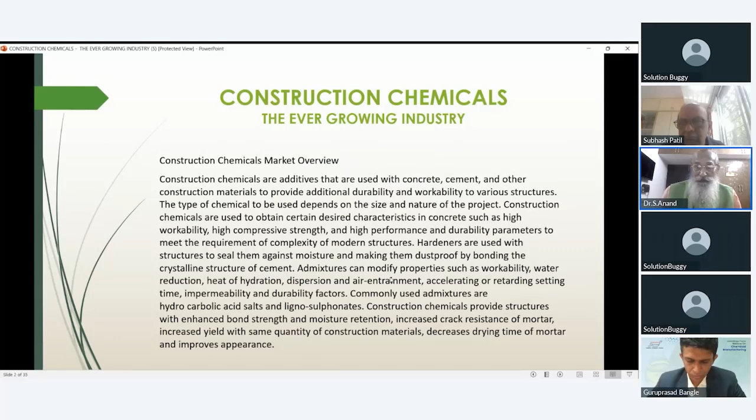There are various sectors in construction chemicals, with different types of products. In the next few slides, you will be able to see that, which I will explain one by one. Next slide, please.

On the basis of types of product, the global market is classified into concrete admixtures, waterproofing material, flooring, industrial flooring, tile adhesives in the tiling sector, repair and restoration mortars, and other items like sealants, grouts, performance chemicals, and other additives which are very important during the construction of building and structures.

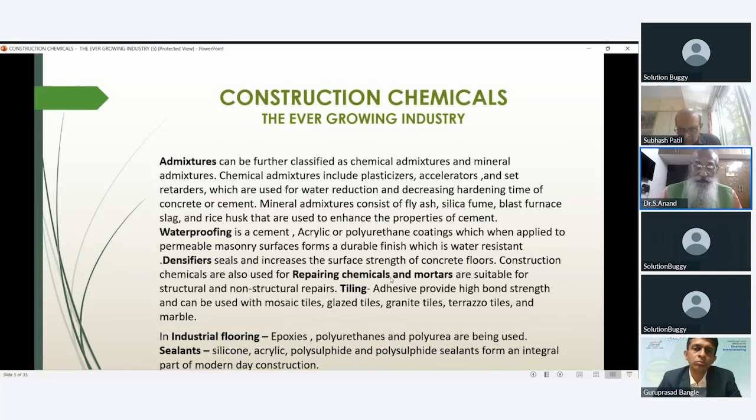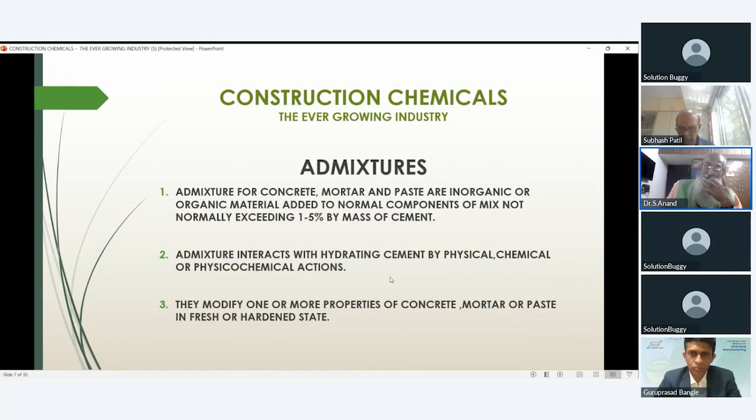Admixtures are usually very complex chemical compounds, excepting a few. They're unlikely to be pure compounds, but associated with some minor chemical additives, or they may be mixed formulations. Thus, admixtures are those ingredients in concrete other than Portland cement, sand, aggregates, and water that are added to the mixture immediately before or during the mixing of the concrete in the RMCs, ready mix concrete plants.

The classification of admixtures: there are different types like air entraining admixtures to make lightweight concrete, water reducing admixtures to give high strength.

Hello, am I audible? Good, please go ahead. Yeah.

Plasticizers, super plasticizers, accelerated admixtures, and retarding admixtures.

Hydration control admixture, waterproofing admixture, where the crystalline admix is used to make the entire concrete structure waterproof, corrosion inhibitors, alkali silica reactive inhibitors, then coloring admixtures, and miscellaneous admixtures such as those for improving workability, bond strength, high strength, damp proofing, permeability reducing, grouting, gas forming, and pumping admixtures. These are all the different types of admixtures which are used as per the requirement of the site conditions.

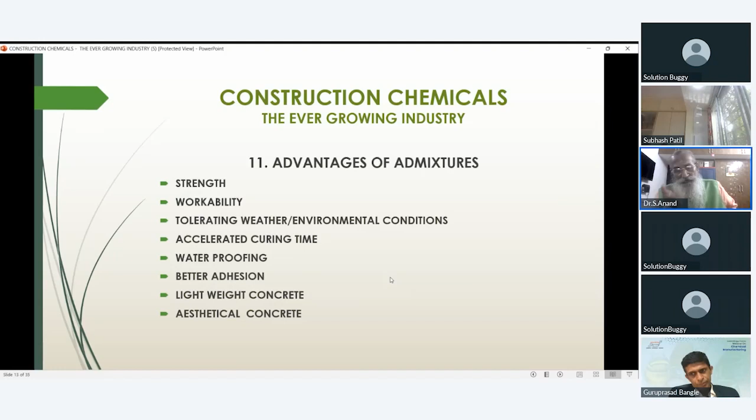Can you also tell us how much it would cost to set up a plant if somebody is looking to set up an admixtures plant? That setting of a plant is coming at the end. How much will it cost? On the next slides, almost at the end of the presentation, you also get it. Right, okay.

Now this is a broad picture of waterproofing chemicals, where all it can be used in a housing structure. You can see it can be used in the terrace floor, for water tanks, sunken slabs, all these areas in the terrace. Then for walls, you can use it for interior and exterior wall waterproofing. Then for underground sumps and all underground structures, you can use the crystalline admixture, waterproofing admixtures to make it totally waterproof. Then you can also damp proof the walls. The crystalline admixture you can use from the negative side also.

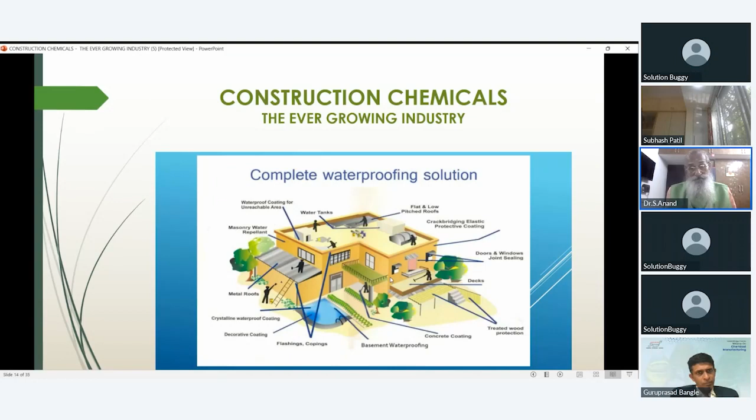Next slide, please. Next slide. Yes. No.

The waterproofing system covers every need of the building and construction industry, to protect from water ingress or loss of water through structures. The complete building structure from basement to roof is protected from rising dampness, moisture, seepage, and leakage. The technology ranges across acrylic, SBR latex, crystalline, epoxy, water repellent polysiloxanes, polyurethanes, and bituminous based formulations - these are the different types of waterproofing material. The coating fills and seals the concrete pores, micro cracks, and capillary tracts in joints, walls, floors, through which water seepage can occur, forming an integral part of waterproofing compound without breaking existing brickbat coba and concrete screed. That is about the roof terrace waterproofing.

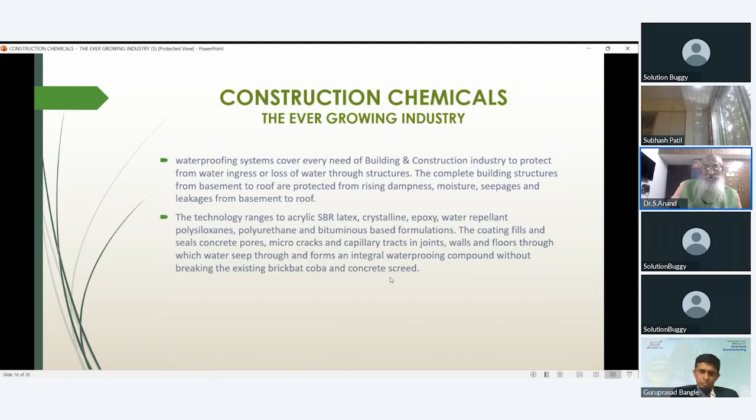Main features of waterproofing are excellent resistance to hydrostatic pressure. These are the conditions in the basement level. Also resistant to water and chemical ingress.

In the seashore area, the water is very corrosive, and if properly waterproofed, it is resistant to this chemical ingress. Then there is protection from moisture permeability in high water table areas. The water table is high, so moisture can permeate from the floor, but if properly waterproofed, this moisture will not permeate.

Protection from corrosion. In terrace areas, etc., wherever reinforcement bars are used, if there is no proper waterproofing, moisture will penetrate and the bars get corroded. In due course of time, they will form rust, expand, and spall. Spalling will occur and the structure will start degrading.

So waterproofing is a very important aspect.

It can be applied on old and new structures, and also from the negative side. As I told you, the crystalline waterproofing system can be applied from the negative side. Normally waterproofing is done from the outside, but suppose your structure is complete and then you have a problem, this crystalline material can be applied from the negative side inside, and it will go into the structure and waterproof the capillaries, sealing them so the structure becomes waterproof.

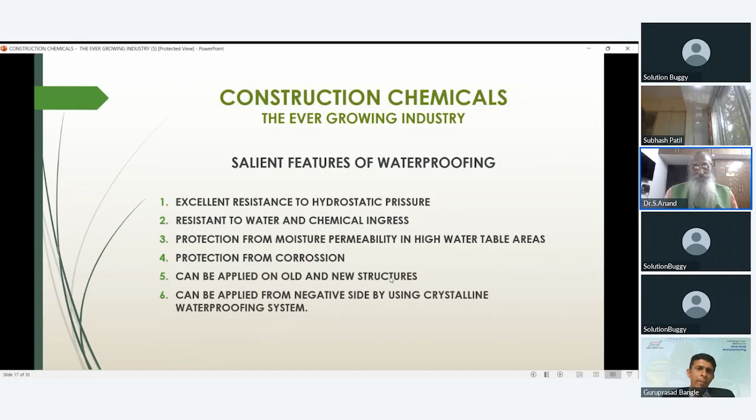Sir, one more doubt people have is there are already players like Dr. Fix-It, or it could be Asian Paints. How does a new entrepreneur compete with such players?

Now, applications of where waterproofing can be applied: tunnel construction, retaining walls, foundation walls, parking areas, terrace gardens, cooling towers, balconies, terrace basements, underground sumps, reservoirs, ponds, kitchen and wet areas, podium, roofs, exterior and interior walls. These are the complete areas where waterproofing has to be done. It's a mandatory thing, otherwise the structures get dilapidated very soon.

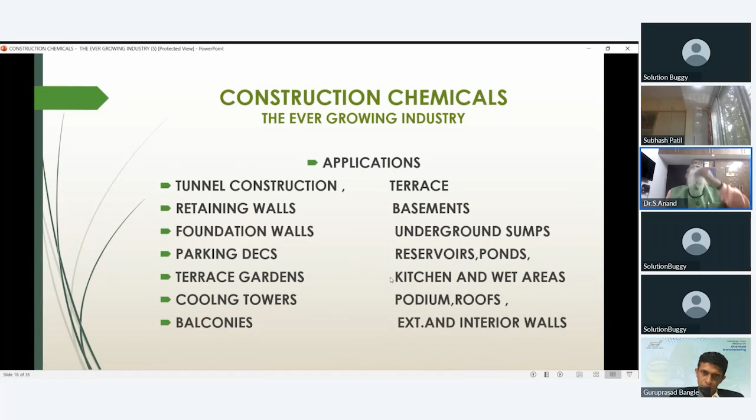Next segment is industrial flooring. As I told you in the beginning, there is epoxy, polyurethane, polyurea, and then you have polished concrete flooring.

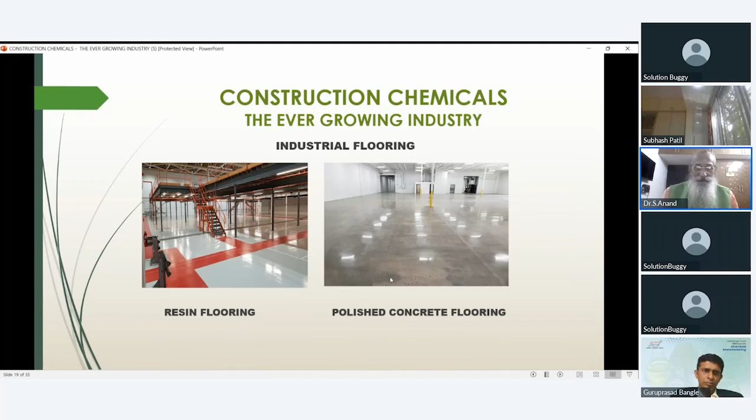So this is epoxy, polyurea - these are the pictures.

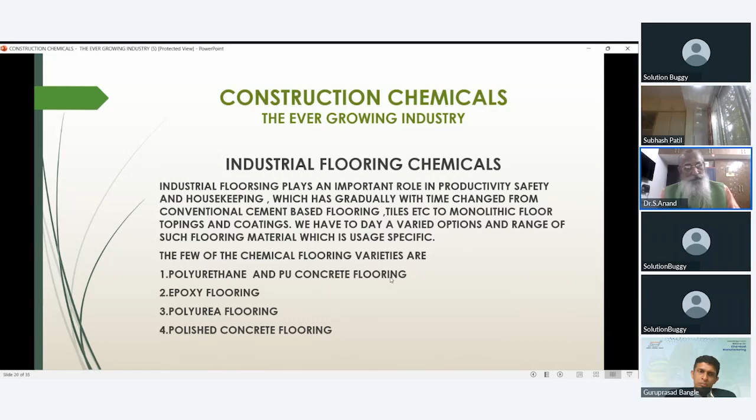Industrial flooring plays an important role in productivity, safety, and housekeeping, which has gradually changed over time from conventional cement-based flooring, tiles, etc., to monolithic floor toppings and coatings. Today we have a very varied range of flooring materials which are usage specific, such as polyurethane and PU concrete flooring, epoxy flooring, polyurea flooring, and polished concrete flooring. I'll explain each of them in the next slides.

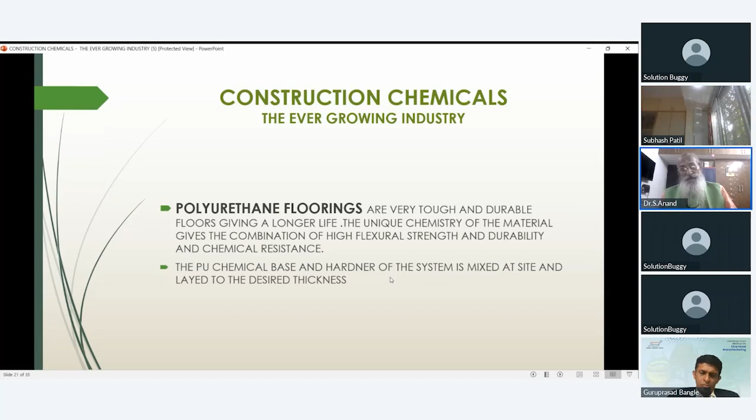Now, epoxy flooring has been very popular since the 1990s. These are engineered chemical adhesives that give industrial floors durability, scratch resistance, chemical resistance, besides strength and bonding to the basic concrete substrate. These are the qualities of epoxy. The base and hardeners are mixed at site and laid to the desired thickness by specialized applicators.

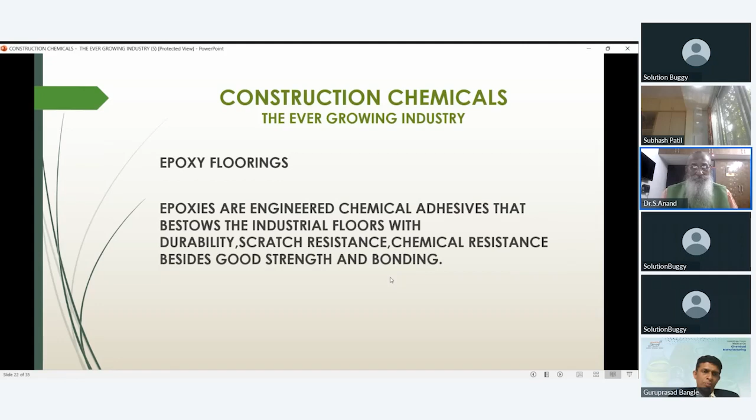The advantages of epoxy flooring are that it protects the concrete floor, gives chemical resistance, is washable with water and also steam, and provides a clean and pleasing atmosphere. You can have the color of your choice. It is very hard and scratch resistant.

The advantage of polyurethane flooring is that it is UV resistant. Epoxy can be used only for internal floors. For external areas, polyurethane has to be used because epoxies chalk when exposed to UV rays. So that is the limitation of epoxy flooring.

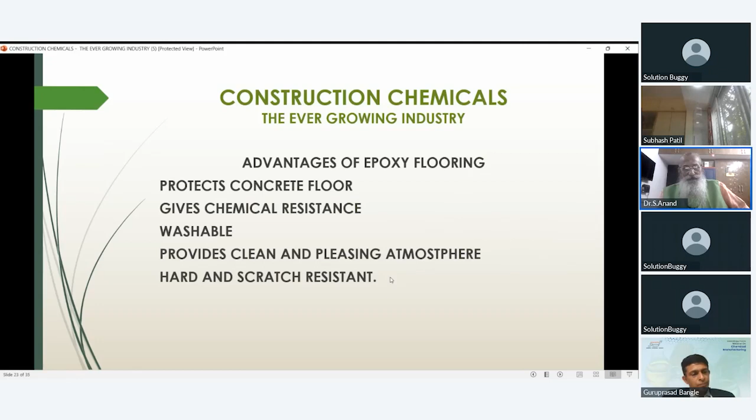These polished concrete floors have been quite popular since 2008 or so. This is done on hard floors, like M25 grade concrete floors. These are densified with concrete densifiers and then polished with planetary grinding machines, which have diamond tools fixed in them. Their polishing is done in 7 steps, giving you a very shiny surface that is easy to maintain and water resistant.

An example these days is Daimler, the truck factory, with about 1.5 lakh square meters of floor. Everything was made as a polished concrete floor, so there is no topping on it, and breakage doesn't occur.

This is in Oragadam, Chennai, a very big factory. This system became very popular in Europe, the States, America, and also Australia. In India it is catching up slowly, and these days it is getting specified in most projects, with some areas definitely using a polished concrete surface.

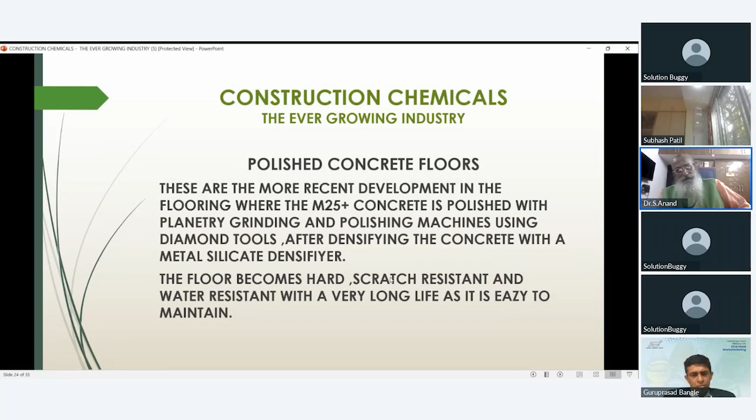Next is the tiling range. As I told you, these days everybody uses tile adhesive, where the bed height is very thin. It used to be almost 12 to 25 mm of mortar required when the original tiling was done. Once tile adhesive came into being, the mortar thickness became very thin.

The adhesion is very high and uniform, fixing is easy, and it is very clean - washing and all is very clean, and it can be fixed quickly. Even with old tiles, you can fix new latest tiles with these tile adhesives on top of the old tiles without breaking them.

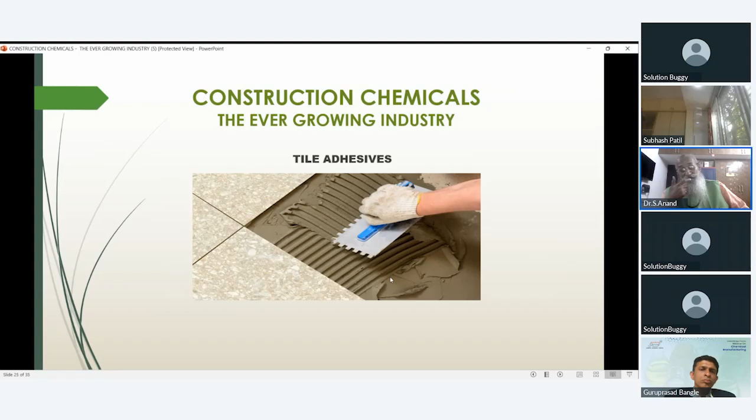These are primarily a premixed blend of exceptional, well-chosen ordinary Portland cement, well-graded fine sand, and additives to improve the basic properties for laying tiles and giving it more strength and flexibility. That is the basic property of the component.

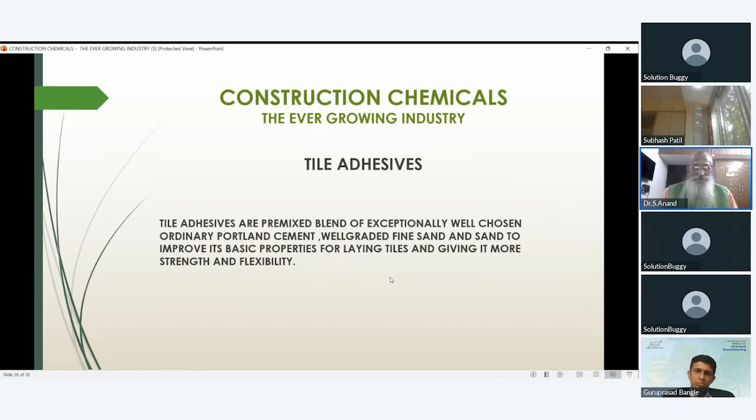Advantages of these adhesives are improved durability, easy installation, time and cost efficiency, versatility in application, enhanced moisture resistance, flexibility and crack resistance, environment friendly, and easy cleanup.

These waterproof tile adhesives can be used in swimming pools for fixing the swimming pool tiles, so there's a very wide application in 5-star hotels. The swimming pools are there, so there's very good demand for that, with small tiles applied using these tile adhesives.

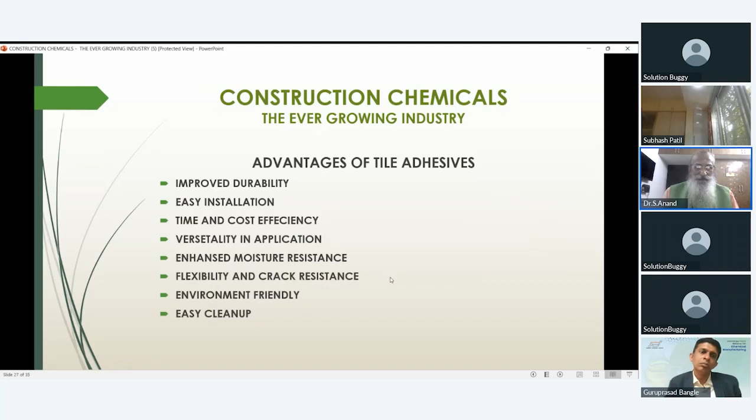Next comes the sealant segment, construction sealants. Any construction, any big flooring has construction joints and expansion joints. Then when structural glazing is done, the glass panels are sealed with silicone sealants. When there are two glass panels with vacuum in between, they seal the sides with silicone sealants and fix it with silicone sealants.

For expansion joints and construction joints, there are different types of seals in the market, and wide joint sealants are there for very big joints. These help in keeping the floor stable because there is thermal movement. That is why the joints are provided, and the sealants help keep things in level, as well as maintaining the aesthetics of the floor.

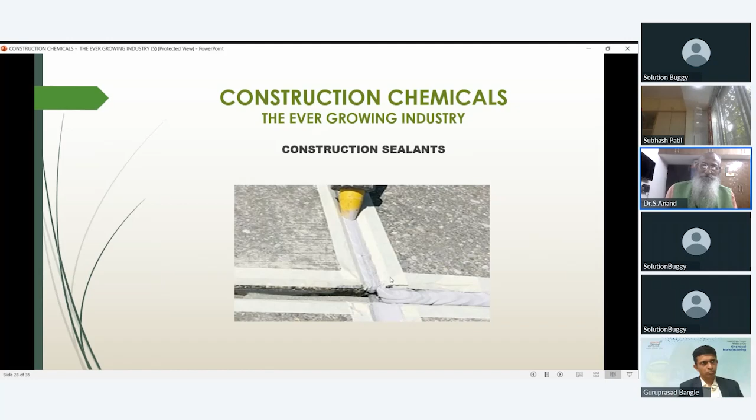Sealants don't allow the passage of fluids through the openings, making it waterproof. There are different types of sealants, like acrylic latex or polyurethane based, which also serve the purpose of blocking dust, sound, and heat transmission. Sealants may be weak or strong, flexible or rigid, permanent or temporary, as the requirement may be. Sealants are not adhesives, but they have the quality of adhesives and are called adhesive sealants or structural sealants.

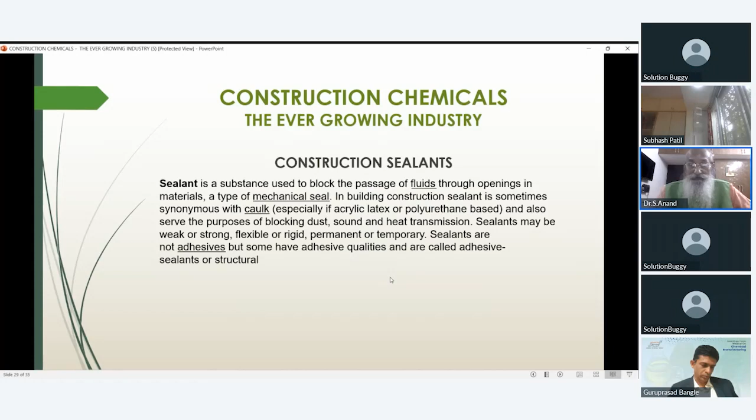Despite not having great strength, sealants seal the top structure to the substrate and are particularly effective in the waterproofing process by keeping moisture out. The compounds in which they are used can provide thermal and acoustical insulation and may serve as fire barriers. They may have electrical properties, as well as being used for simple smoothing or filling. They are often called upon to perform several of these functions at once. This caulking sealant has three basic functions: it fills the gaps between two or more substrates.

It forms a barrier through the physical properties of the sealant itself, and by adhesion to the substrate, and it maintains sealing properties for expected lifetime, service conditions, and environment. The sealant performs these functions by way of correct formulation to achieve specific application and performance properties. Other than adhesives, however, there are few functional alternatives to the sealing process. Fire resistant sealants are there, which these days are mandatory for electrical work, used as a precaution for fire resistance.

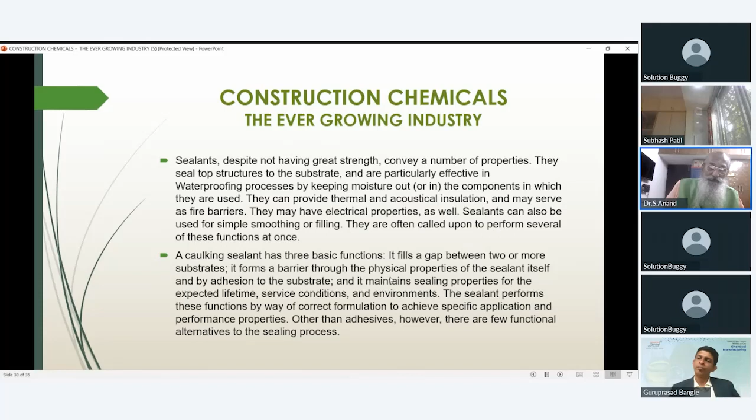Sir, there is a question that since a lot of these paint industries are getting into waterproofing, is there a demand that will be there for the purely waterproofing chemicals industry?

All these, see, like I will be telling in the next slide, there are more than 400 plus formulations and different types of material. So all these things are used. That is why when you have a construction chemical industry, you need a range of construction chemicals, because from a marketing point of view, you don't know what orders you will get. If you say you don't have this, then the customer is going to the other person who has everything.

Everybody wants to buy from the same source, so you need a range of construction chemicals. That is why it is very big, and anybody can come into it. There are people who are only doing one product and selling throughout the world, like the crystalline waterproofing chemical. There are companies manufacturing and exporters, 2-3 companies all over the world who are just selling in 80 to 100 countries.

Companies like SLI - silicone sealants, acrylic sealants, siliconized acrylic, then polysulfide sealants, in which you have gun grade and pouring grade, then polyurethane sealants, both gun grade and pouring grade, then epoxidized polyurethane sealants, where also you have pouring grade and gun grade.

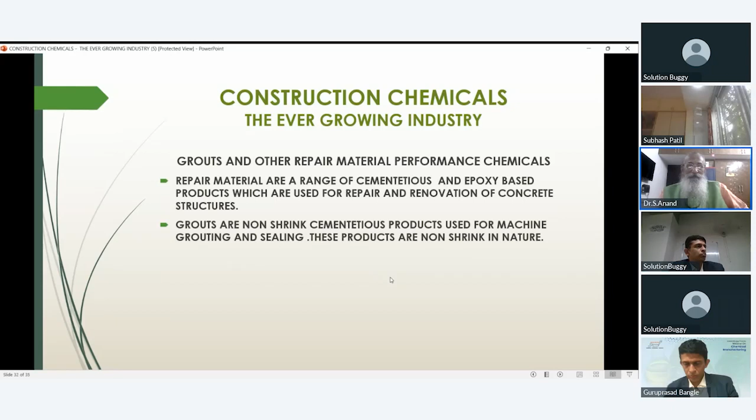Construction chemical industry, as I have told you, has grown from a few crores to 25,000 crores to the present day, and is trending towards 40,000 crores by 2030. The global market requirement is projected at $50 billion by the year 2030. There is also a lot of scope for these products being exported to third world countries.

It is happening. The industry is covered by 3 types of manufacturers: the multinationals like BASF, Penetron, Mapei, Schomburg, Sika, then RPM Group, Huntsman. There are companies who manufacture only one product, like Huntsman manufactures epoxies. Then you have companies like Laticrete manufacturing only the tiling range, whereas companies like BASF and Mapei make each and every chemical and raw material of the complete range.

The Indian multinationals like Pidilite, Asian Paints, Dr. Fixit, CP Polyurethane, Fairmate, and Sunanda Chemicals - they are all the big Indian players. Then you have medium and small manufacturers like Ultracon, Infrachem Gurgaon, Compact Mix Coimbatore, Monarch Industrial Products Theni, Build Care Mumbai, Buildcore, Perma Construction Aids Vapi, Petrocoats Chennai, and many others.

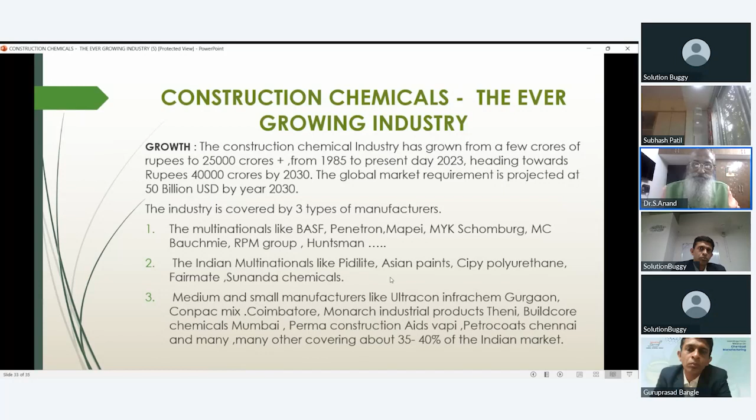Now SolutionBuggy can arrange for a suitable consultant investor meeting to provide you with A to Z details of setting up a construction chemical manufacturing unit, as a brief for the investors interested in setting up the units.

The selection of range of products can be one single category, a complete range, or a few categories. This is possible. Manufacturers who intend to manufacture can also get products toll manufactured in the initial stage and then slowly enter into manufacturing once their market is established. That is another way of getting into the industry.

Budget can start from rupees 30 lakhs for one category to rupees 3 crores for the complete range. This includes plant and machinery also. It can be a complete automatic plant, a lab, and initial investment of raw material. Land and building shall be extra cost, that has to be provided separately.

So when you say consultancy charges are included, for one category it could be a category like sealant or admixture, and that will cover the complete range of products in that category, which is the 3 crores figure. For 30 lakhs it's for one category. Since the machinery is going to be the same for all of them, that's one set of machinery you need.

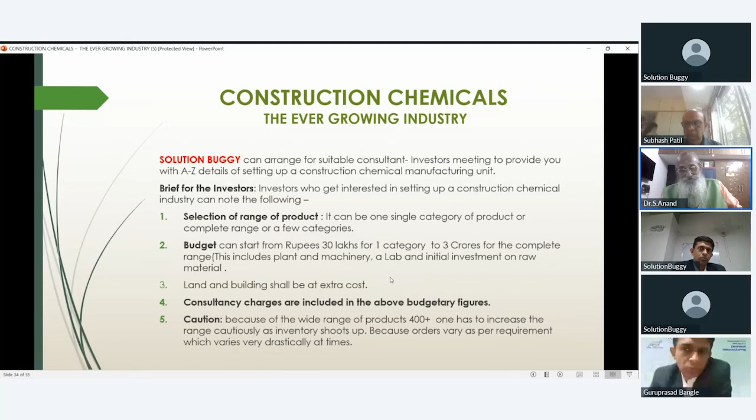Next slide. I thank everybody for listening patiently to this old man. For any help from my side, please contact SolutionBuggy. Any one of the SolutionBuggy executives will guide you on how to go about it. We have successfully completed the first few projects also.

So the key takeaway is basically that construction chemicals by and large has a category of products that one can look into, and based on the investment one can put in, they can either go for all the categories or select a few. But as Dr. Anand also mentioned, the industry can have drastic changes in requirements. So to ward off liabilities, you can probably look at least 2 to 3 categories, so that even if one category is not performing well, you can break even in the others.

So having said that, the investment range can be anywhere between 30 lakhs to 3 crores and even more. Your potential consumers can be large B2B players who are again in the same category, some very focused on a few categories only, whereas some have the full bouquet of 400 plus chemicals with them. These people can be a good target market for you initially, until you can build your own brand. There are also a few private labeling opportunities, but it is not as easy as in the F&B and FMCG segments.

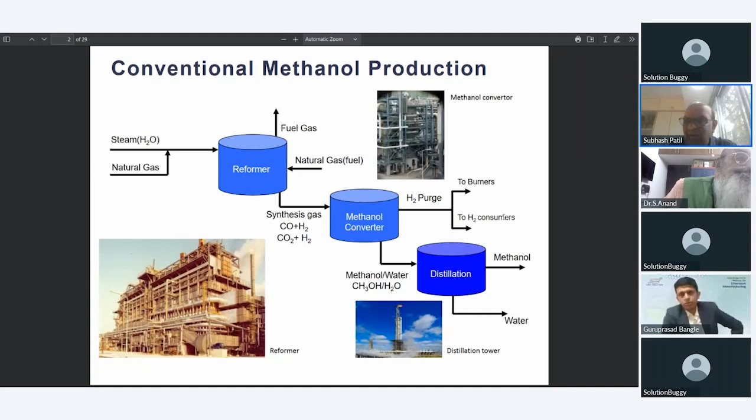Now, earlier, this is one of the main methods - methanol production from natural gas and methanol production from coal. In China, they do not have much natural gas, but they have vast resources of coal. I have visited China, went to one of the methanol plant commissionings there, because I was working with Haldor Topsoe, who have a methanol technology license there.

I was sent from the Haldor Topsoe side to China to see what they do. They gasify the coal - it is powdered and then gasified in the gasifier, which generates CO and hydrogen from the coal, also mixed with steam. So hydrogen comes from steam and CO comes from the coal. Further, CO is converted to CO2, which also generates some hydrogen.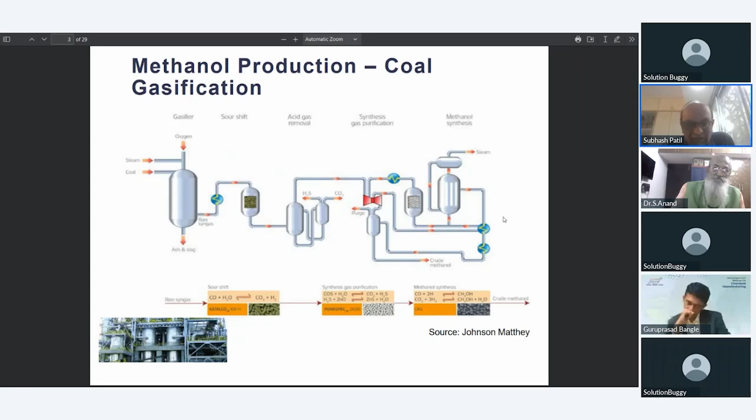So methanol is the conventional fuel from the earlier stage, produced from natural gas and coal. This is just methanol production as a bridge to sustainability, meaning how we will sustain on methanol. There are various expansions of energy markets for methanol, which build demand for sustainability and source, from different fossil and natural gas combinations.

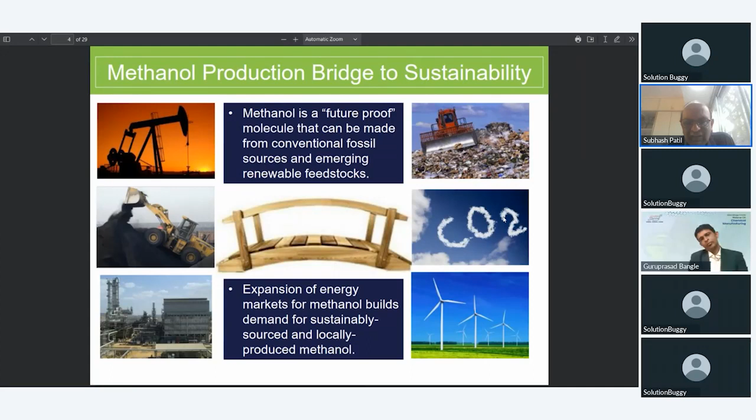Now several renewable production pathways exist. We have seen the conventional pathway first: CH4, that is methane, or natural gas. The reformer generates CO, CO2, and hydrogen, which goes to the reactor where they react to form raw methanol. Then the raw methanol is purified by distillation, and CH3OH is the pure methanol. This is the conventional route.

Now we have a new route. We call it CO2 recovery and utilization. There are different options, which we'll see in the next slides.

Then there's liquid electricity, meaning electricity we store in the form of methanol, or ammonia, or hydrogen. How can we store it? Solar electricity cannot be stored because it's only available in the daytime, so how do we store this electricity? We produce methanol, green ammonia, or green hydrogen using this electricity, and that is converted to liquid electricity and stored. Otherwise there is no storage for it, and solar electricity is just wasted. So we have to use it this way.

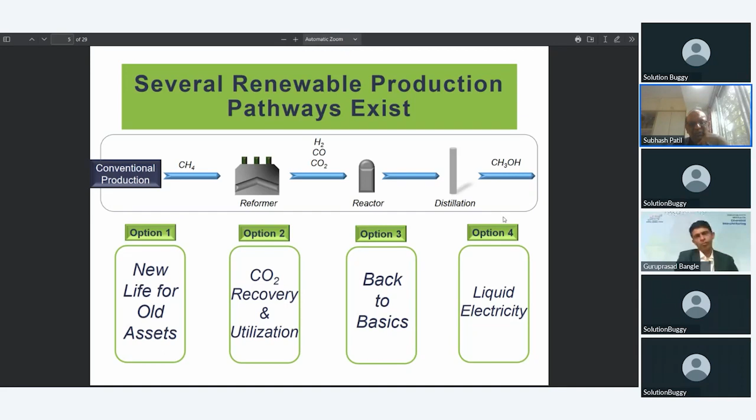This is basically biomethane. Biomethane means nothing but methane, natural gas generated by biological waste. Biological waste comes from sewage treatment plants and agricultural waste and manures, which generate gas. That is biomethane.

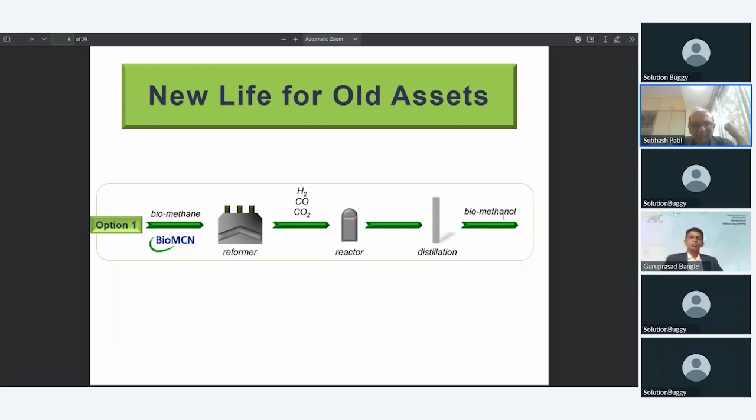Now, CO2 recovery and utilization. When we fire the reformer in the conventional process, a lot of CO2 is generated, and this CO2 has to be recovered and stored. Those plants are called blue plants, like blue ammonia. Along with green ammonia, there is blue ammonia, meaning ammonia generated by the conventional method from natural gas, but the CO2 generated in the process is recovered and stored and utilized for some other purpose, like pressurizing oil reservoirs.

Or you can use this CO2 for the production of methanol. This is how we can use CO2 for generation of methanol, or for the oil reservoirs, where CO2 is pumped underground to build pressure in the reservoir and get higher oil production.

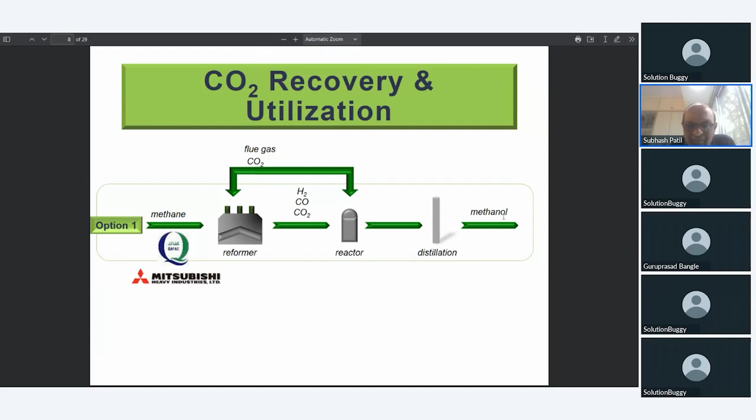These are the Qatar fuel additives utilization records for CO2. This is the diagram for the CO2 recovery plant. CO2 is recovered from different sources, because CO2 exists along with hydrogen, and we have to recover this CO2 from the hydrogen to use it for fuel purposes. There are different methods for CO2 removal, like the acid-amine method. BASF Germany has an activated MDEA process for the removal of excess CO2.

There's CO2 extraction from the flue gas, then injection into the methanol plant. So CO2 recovered can be used for methanol production. That is a great advantage of green methanol production, that CO2 can be used - we call it carbon recycling. In other processes you cannot use the CO2, you have to just store it, compress it, and dump it under oil reservoirs. But in the case of green methanol, this CO2 can be used, so it's a great advantage compared to ammonia.

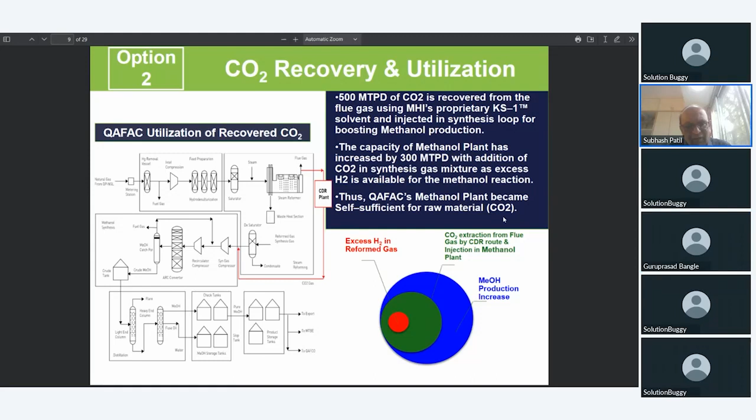Also, methanol has many other applications. Methanol can be used for production of many other chemicals - methylamines. Methanol and ammonia can form methylamines, which are used in many pharmaceutical industries in small quantities. Methanol can also be used for production of formaldehyde. So there are a number of chemicals that can be produced from methanol - it has a vast scope. We'll go to the next slide.

This is the typical slide for CO2 recovery from the flue gas. So flue gas from the conventional chimney of the stack, from any factory, has mainly a lot of CO2, and a little CO and some other gases.

This CO2 can be recovered in the absorber. The flue gas, which is mainly CO2, is sent to the bottom of the absorber, and then it passes up, while from the top of the absorber we are sending some solution, with two stages at the top and the middle. This solution at present is methyl diethanolamine, called MDEA, widely used as a CO2 absorbent, because CO2 is absorbed in the MDEA.

For removal of CO2, we just dissolve it in the stripper. So the CO2 we are getting, this solution gets absorbed. This absorbed solution along with the CO2 in it is sent to the stripper, where with the help of steam it is heated, and from higher pressure it is flashed to lower pressure, and CO2 is generated. This CO2 purity is 99.9%, removed from the flue gas. So the gas we are venting into the atmosphere is free of CO2. This is the advantage of this CO2 removal process.

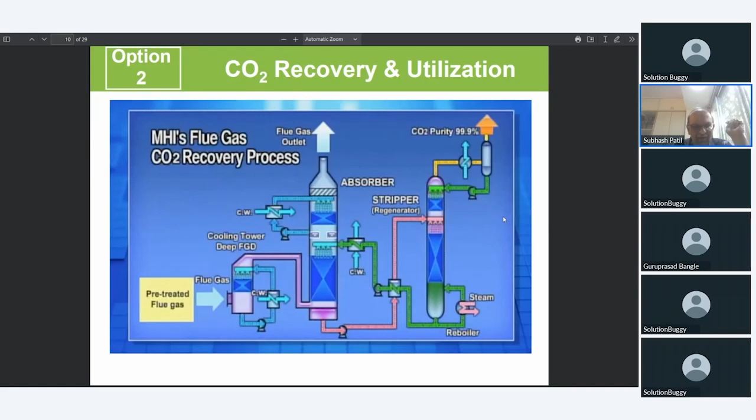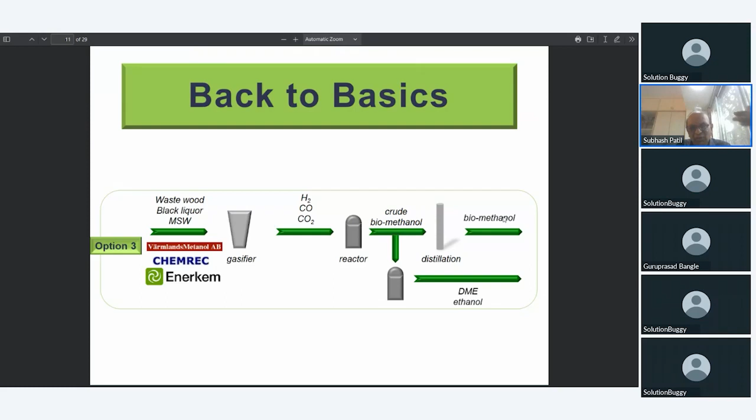This is a small basic overview of how we are generating methanol, already shown in an earlier slide. This is just a revision. Next slide.

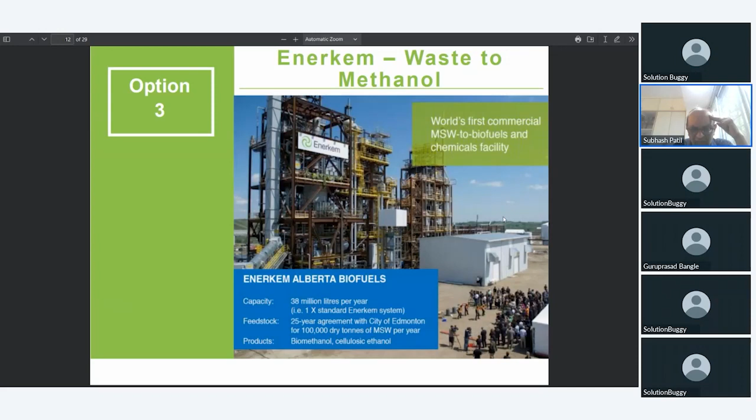This is the photograph of the world's first commercial biofuels and chemical facility, just to show. This has a capacity of 38 million liters per year. This is biomethanol, that is called. Okay, next slide.

This is the same storage, showing the storage picture and other synthesis units, the gasification section. Okay, next slide.

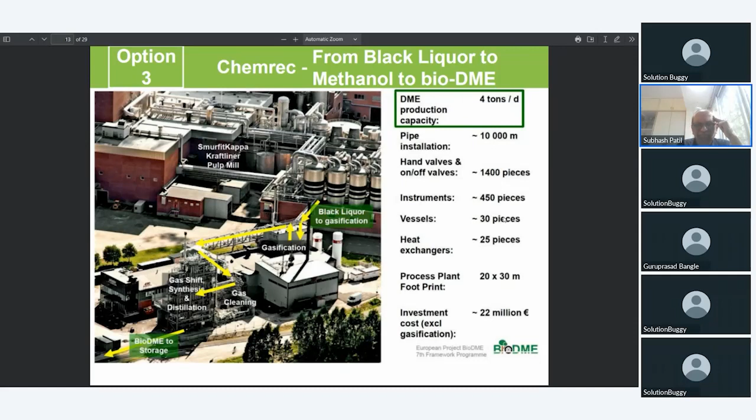Okay, this is the same again, a general photograph. Next slide.

So this is liquid electricity, what is today's mission: convert solar and wind electricity into liquid electricity, which we can store. This is option 4, and this is today's option now. Business opportunities are coming up, evolving into this sector.

So you can see electricity from solar and the wind turbine goes to electrolyzers. Then CO2 is captured, as we have discussed before, by the CO2 recovery system from flue gas. Hydrogen coming from the electrolyzer and CO2 coming from CO2 capture both go to the reactor, then distillation, then e-methanol. We call it e-methanol, also green methanol.

So this is the overall picture of how we convert electricity from solar and wind into liquid electricity. During daytime we are using this, the production will be highest in the daytime and lowest at night time.

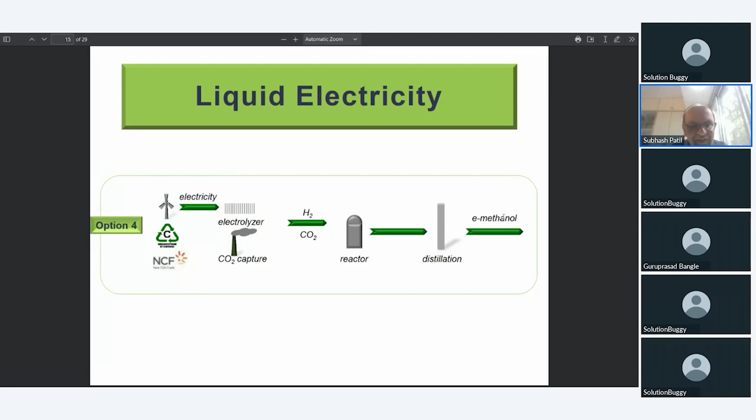Okay, next slide. This is a renewable methanol plant photograph, from Carbon Recycling International. So they are doing that - methanol is nothing but recycling CO2. This is the great advantage of methanol, we can use CO2. Next slide.

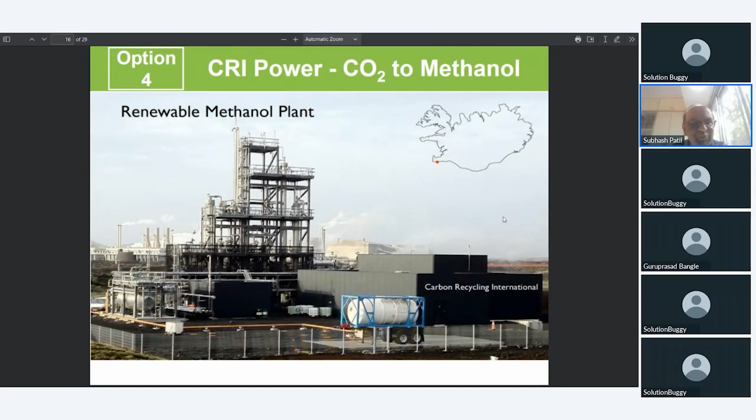Now continuing with option 4: pathways to storing renewable electricity. Electricity storage is also a challenge. Earlier it was not happening, but now we are using the option to convert electricity into liquid storage. Converting intermittent renewable power, because this power is not available during night time, only daytime, so we store it in the form of liquid electricity as an alternative option to e-mobility while reducing CO2.

The amount of energy stored in 1 cubic meter of methanol equals the storage capacity of 222 battery electric BMW i3s. That much power is stored in 1 cubic meter of methanol.

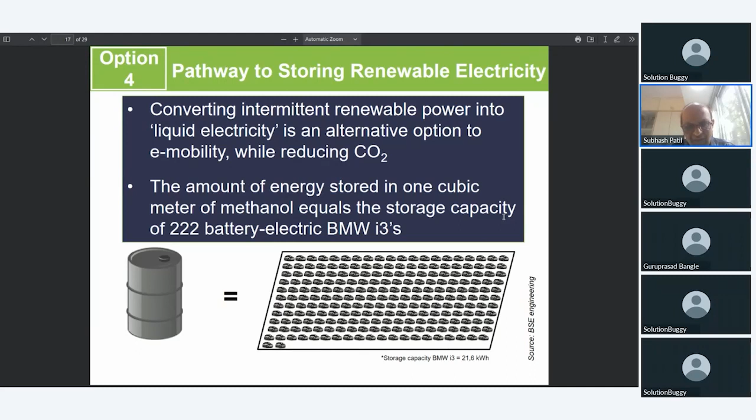Okay, next slide. Now new markets are developing for this. Current methanol demand and potential market demand. This potential demand will be rising too much, as you can see.

Methanol to olefins, there is so much demand. Methanol to gasoline - at present, there is a Haldor Topsoe company where I was working, and they have designed to convert methanol to gasoline also. So we can produce methanol and then convert it to gasoline. There is a separate technology available for this.

This will be used like gasoline, petrol. Methanol will be fully converted to gasoline and used as petrol. So there is tremendous demand for this.

Fuel cells - these are used in cars, so this is also a new development. Gasoline, biodiesel, and DME are the normal fuels, and methanol is a green fuel. These are the current demands, and these are the potential demands - you can see the huge demand for the future. So there is a lot of growth potential.

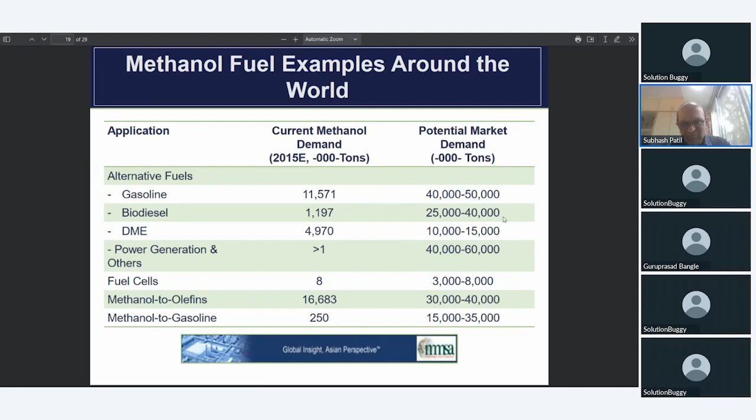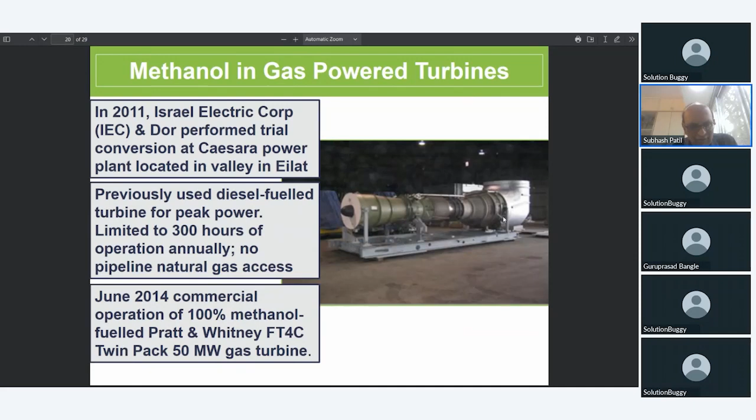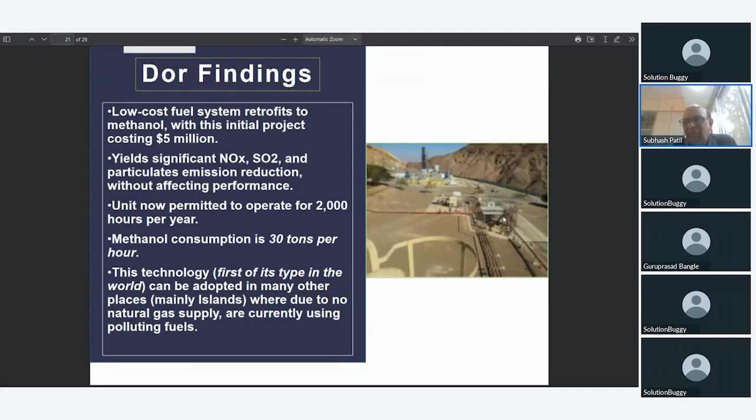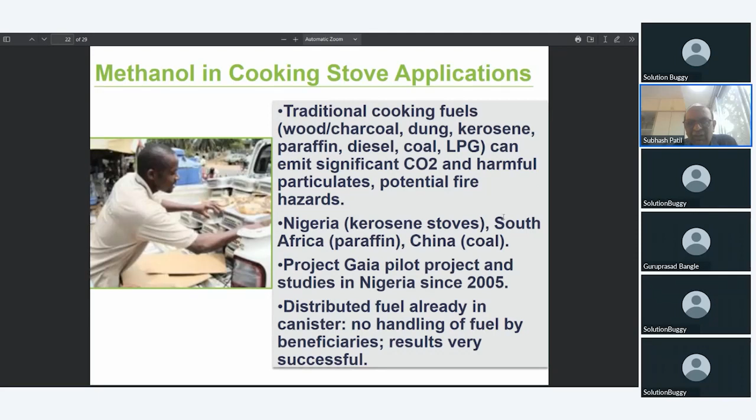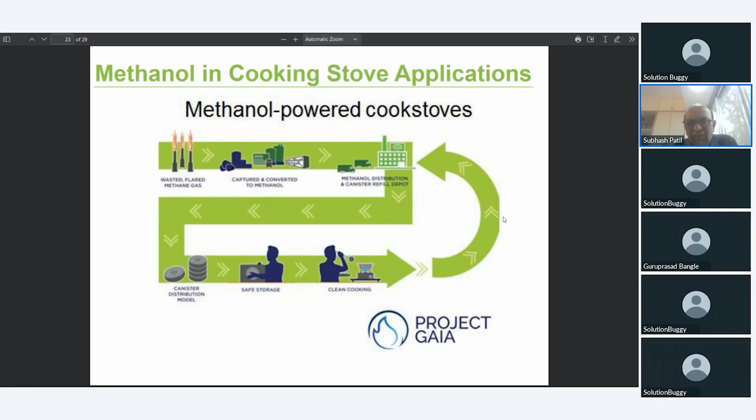Methanol powered cook stoves - same, this is another different application of methanol cook stoves. Next slide.

They are manufacturing methanol from... So you can also tell us about the typical, as of today, costs of setting up a methanol manufacturing unit?

Today's methanol manufacturing units are mainly manufactured using natural gas, that is gray methanol at present. That cost depends upon the capacity of the plant, but it varies - it costs around 600 to 1,000 crores for a medium scale plant, which the government is actually setting up. But smaller plants can come up using electrolyzers later on. The cost of electrolyzers is not exactly known, depending upon the type of electrolyzer we are using, and methanol units using electrolyzers are coming up now in the developing stage, so that cost data is yet to be available.

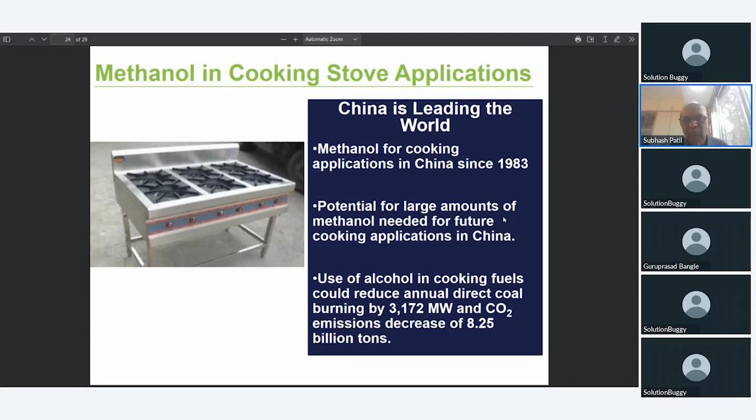These fuel cells are used for transport, cars, but they are not very popular at present. They are still in the development stage because nowadays electric vehicles have come, so fuel cell use is not that popular. People think electric vehicles are much easier to drive compared to fuel cells, which are a bit more complex.

So fuel cell development has now slowed down. When there was no electric vehicle, this development and research was going on in fuel cells, but now it is not given much importance because of electric vehicles.

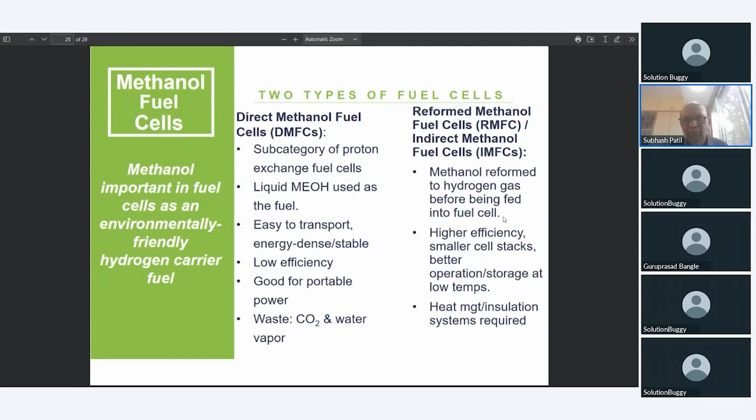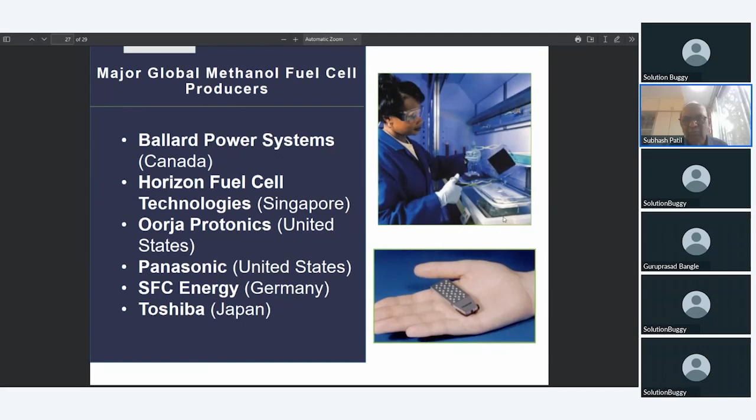This is the same fuel cells slide. Next, these are the fuel cell producers - companies in the United States, Germany, Japan are producing fuel cells. But as I said, fuel cells are less popular now.

That's all, so this is the overall picture. Now we can discuss some questions. Although it's not in this slide, I would like to elaborate briefly on green ammonia. Green ammonia is also made from green hydrogen.

Electrolysis gives hydrogen, and for ammonia we need nitrogen, which comes from air liquefaction. Liquefaction of air separates nitrogen and oxygen. The oxygen is used for some other purpose or vented into the atmosphere, and the nitrogen is used along with hydrogen to produce green ammonia.

One of the world's biggest green ammonia plants, around 2,000 metric tons per day, is being installed in Saudi Arabia by NEOM, using Air Products as a joint venture partner with Saudi Arabia. They are producing this green ammonia.